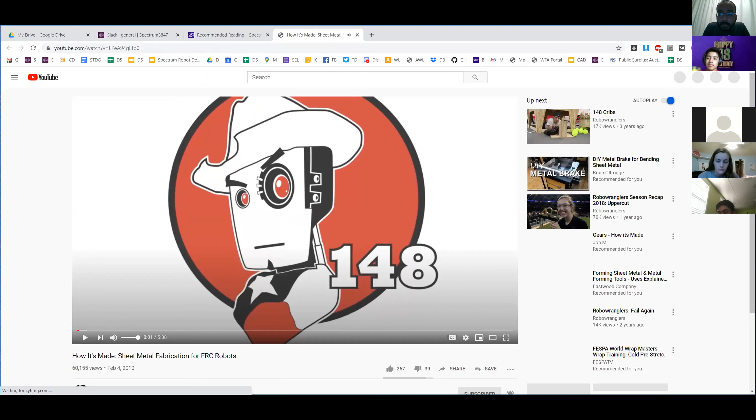In our recommended reading, we have a couple links about sheet metal, one of which is the 148, how they build sheet metal. So this is kind of the CNC process. Like, this is very similar to how our sponsor does it.

Our sponsors actually do sheet metal with a laser cutter and a CNC brake, and they kind of walk you through it. They add a little bit of stuff. They have a turret punch, which our sponsor doesn't have. There's a few other machines that they can have to make the process a little bit easier.

But if you have a sponsor doing your sheet metal, it's definitely a much more expensive process for the equipment involved. But there are things that we can do in our shop, and that's what we're going to talk about for the rest of this after we show this, to make sure we have an idea of what the sheet metal process is.

Why don't I have audio? You guys don't hear anything, right? No. Okay.

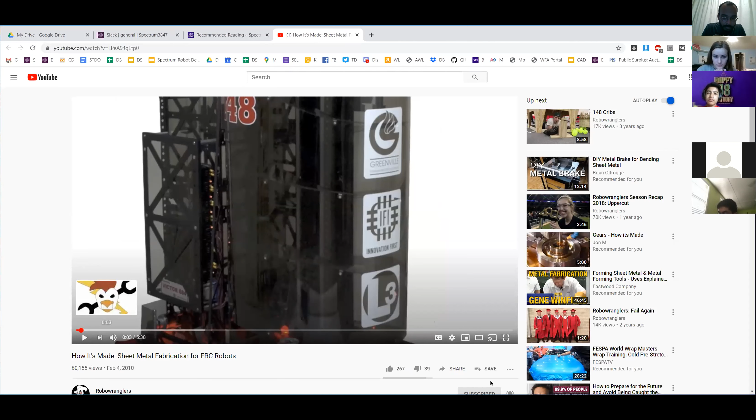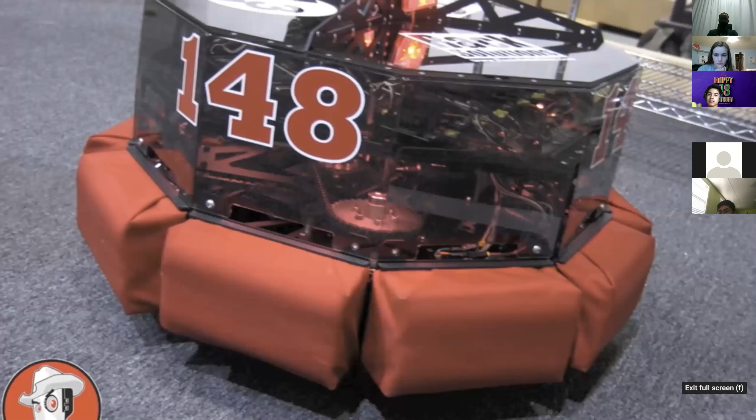Okay, back to here. Of Greenville, Texas, and the Thunder Chickens of Sterling Heights, Michigan have something in common. Their robots are well known within FRC for their distinctive look. This look comes from their almost exclusive sheet metal construction. Today on How It's Made, we're going to learn how this sheet metal is fabricated.

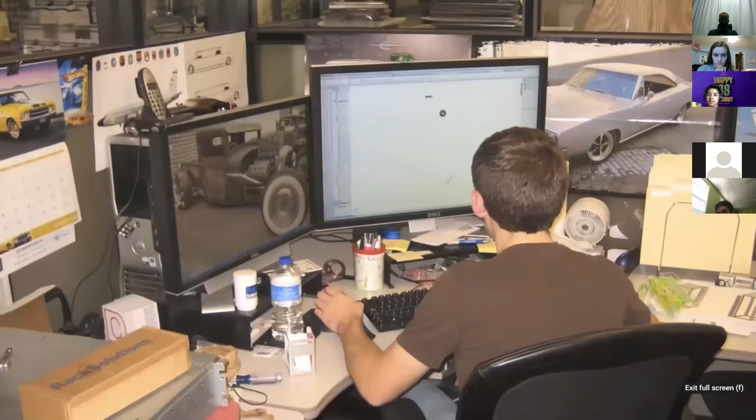After the team has finished their brainstorming and has made prototypes of their major concepts, the design team begins its work. It is their job to CAD the entire robot down to the smallest detail. Using the sheet metal features found in the 3D modeling program SolidWorks, each part is drawn as it will appear on the final robot. These parts are then flattened into flat pieces, which are sent to the sheet metal shop for production. Though the sheet metal shop is a CAD to metal facility that directly imports the CAD models for production, drawings need to be done to show the brake operators how to bend the parts.

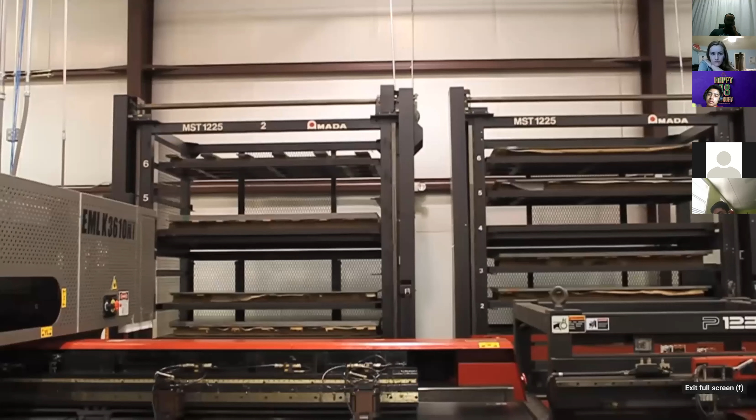Let's step inside the Innovation First International Fabrication House, Metal Solutions. Flat patterns of parts are imported so they can be programmed for production on the CNC laser cutter or turret punch. Every part starts as part of a 4x8 sheet of material. Typically, the Robo-Wrangler and Thunder Chicken parts are made out of Lexan or aluminum. The laser cutter and turret punch has a material loader. It can hold enough material such that the machine can run for almost 60 hours without any human intervention. Flat sheets go in, finished parts come out.

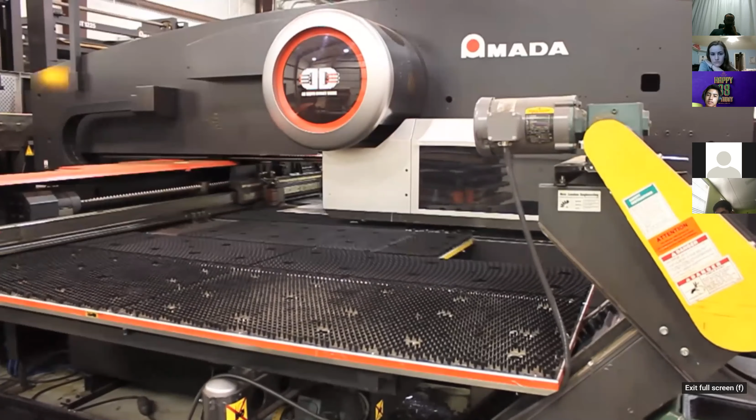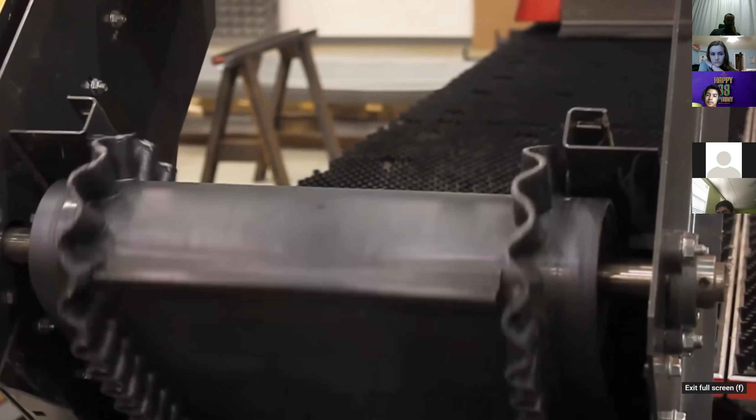Here you can see the turret punch cutting the outline of a part that will appear on the 2010 Robo-Wrangler robot. The CNC turret punch operates just like a 3-hole punch. Instead of cutting through paper, it uses 40 tons to punch right through metal. Here, you see the metal slugs that are punched out the bottom by the turret punch. These are dumped into a bin and then sent off to the scrapyard for recycling.

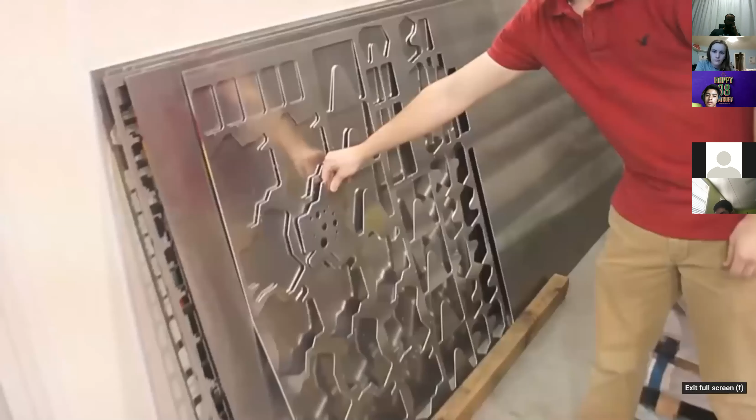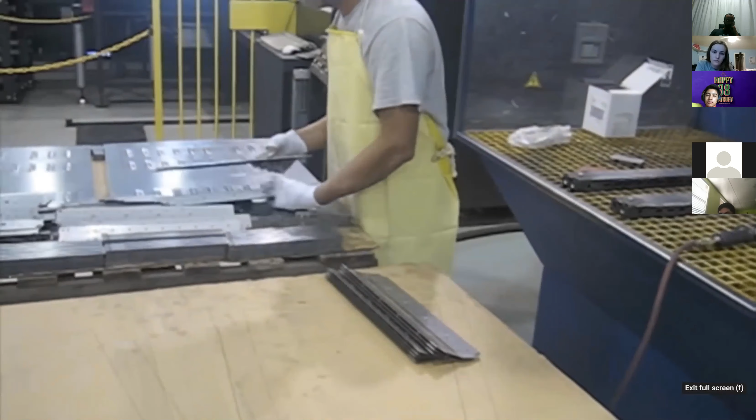Flat parts are still held in place on the sheet by something called shaker tabs. The parts need to be removed from the sheet before they can be bent. These shaker tabs, however, will leave burrs on the part that need to be removed. Here you see one of the deburr guys grinding off the shaker tabs. Each part is fed through the automatic deburring machine. This machine sands down all the edges, and puts a nice finish on each face.

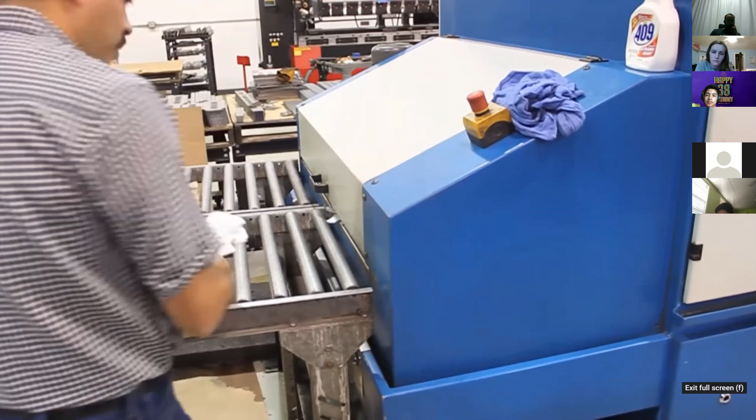After being deburred, the parts go off to the brakes where they'll be bent into shape. Here you see the top and bottom die of a brake. To begin with, the operator takes the flat part and the drawing and has to program the CNC brake. He needs to tune the machine for each individual part such that it is bent the correct amount.

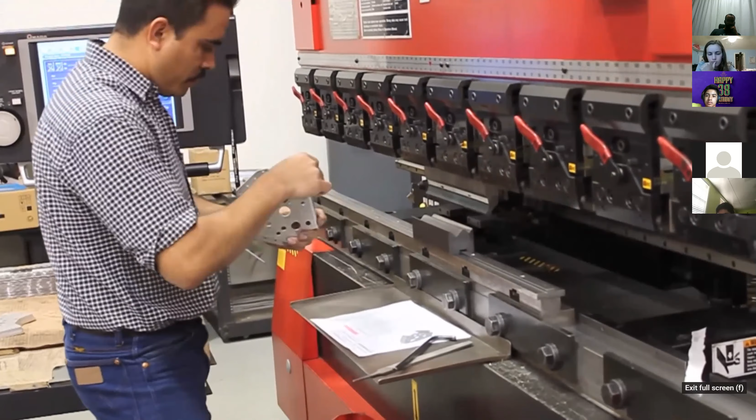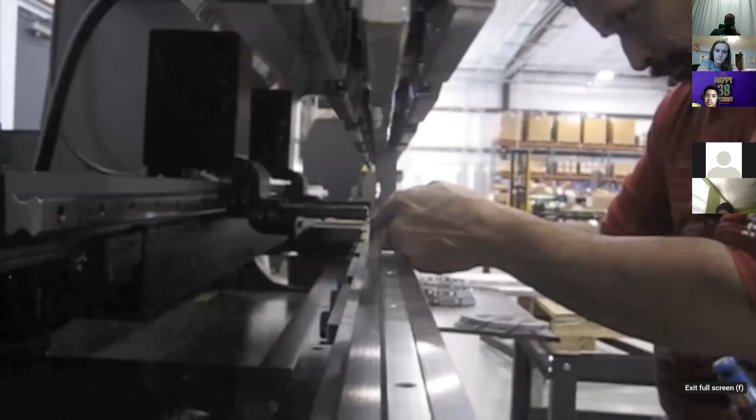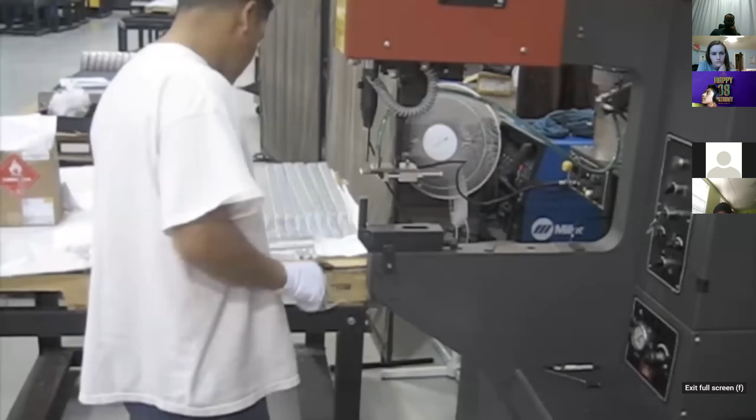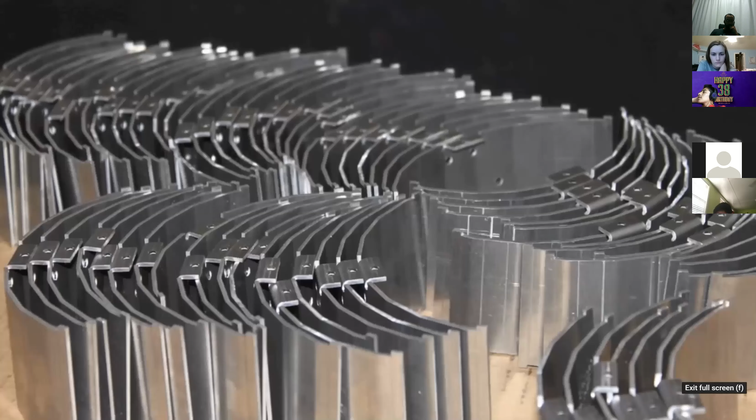Tuning the machine to get the parts just right takes a large amount of skill. After the first part is finished and the machine is programmed and tuned in, all the remaining parts take very little time to produce. Once the parts are finished being bent, threaded inserts are pressed into them. Completed parts are placed on a pallet and sent back to the team for assembly or out for powder coating.

So that's how the industrial process works. One thing to notice is all those parts require multiple people involved to make them. Someone has to operate the laser, someone has to operate the brakes, and people are moving those parts from place to place and keeping track of them. It's a lot of work to support an FRC team with sponsored sheet metal, so we're very grateful to Solarcraft for doing it for us.

It's understandable sometimes when things are off, especially if we don't communicate well. Like they showed in their drawing, we have to give them the drawings for the bends. If we make an error in that drawing at all, the bend's going to be wrong because they program straight off the drawing we produce. There's a lot that can go wrong when we're not involved in the process at all, where we just send it to them and hope it comes back correctly. Most of the time we do a pretty good job and it works, but it doesn't always work.

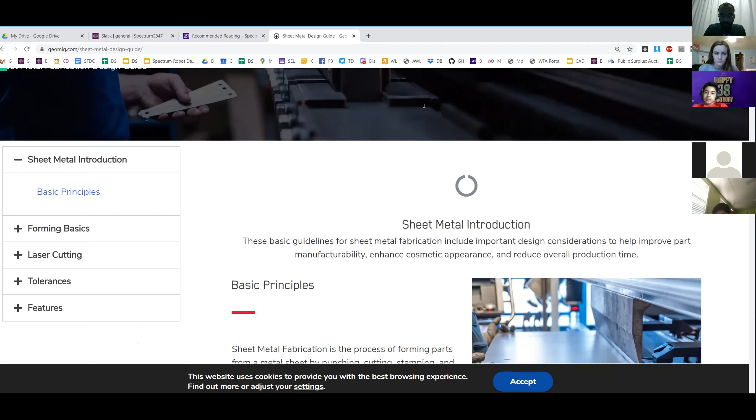The next link in the recommended reading for sheet metal is a new one I found from this company that does production work for other people. My laptop is being weird, let me see if I can get this better. Okay, but it has a good idea of going over the basics of why you'd even want to do sheet metal.

There's a lot of different ways we could build parts on our robot. None of them have to be sheet metal. Sheet metal, or bent sheet metal, is just one of the tools we can use to fabricate something and get the function we want.

One of the big benefits is you can use a thinner sheet and put flanges on it to add strength, just like folding a piece of paper makes it stronger than a flat piece, which bends everywhere. As you start putting creases into it, folding into a box shape, it's a lot harder to bend. The same applies to sheet metal, so we can use much thinner sheet metal than if we were just using a flat plate.

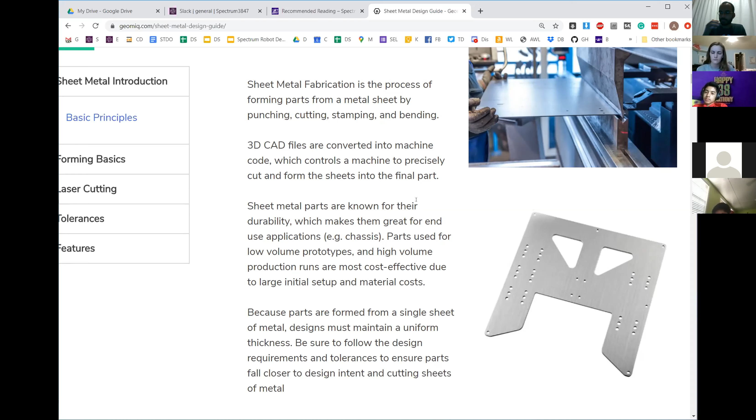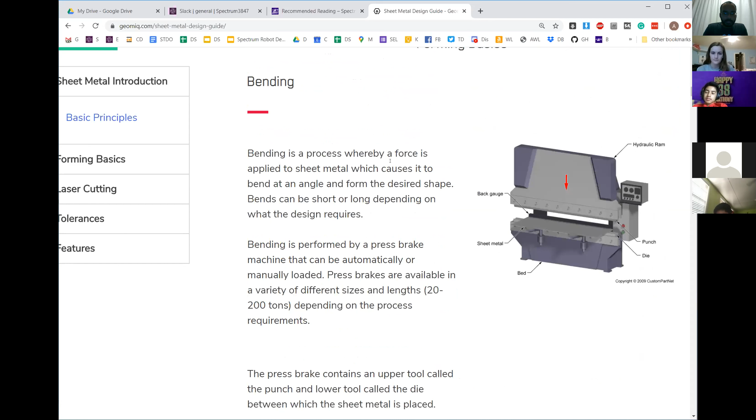So there's a few different types - the press brake is what they have at Solarcraft. We don't have a very large press brake; they cost a lot of money to get anything close to that. The brake we have in our shop is called a box and pan brake, where we have to lift the skirt to actually do the bending.

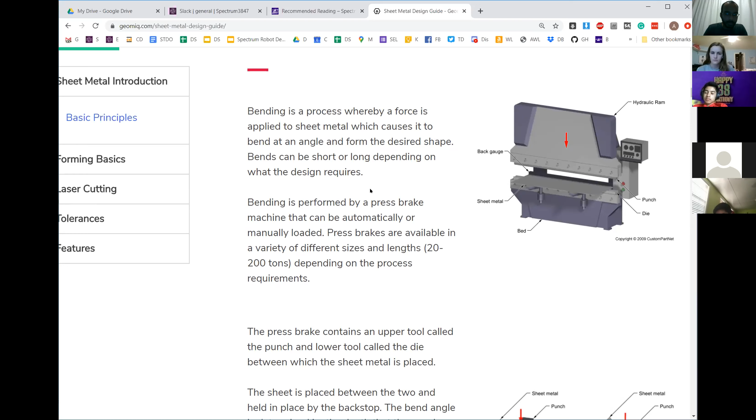It still works and allows us to set pretty decent bends. We can bend relatively thick material with it - ours is big enough to do 1/8 inch aluminum if needed. But a lot of what we want is to bend thinner aluminum and bend polycarbonate too, to use thin polycarb in places and get back some of the rigidity that polycarbonate doesn't inherently have compared to aluminum. It's a lot easier to bend plastic sheet than aluminum sheet, but by adding flanges we can make it stiffer and less likely to bend.

The basics up at the top are just how it actually presses the die in to fully form the 90-degree bend. Anytime you're changing the shape of a piece of sheet metal, it's called forming. For what we're doing, we're basically always using a press brake or a normal brake to do bends. In industry, they'll have form tools that are a lot more expensive, but they can just press right in and get full shapes out of a piece of aluminum - a lot of automotive car panels are made that way.

Very rarely would that be needed for FRC robots, since we're not making thousands of the same part over and over - we're only making a few. Bending is reasonable to do a few times and still get consistent parts. Making an entire press form or anything like that is probably not useful.

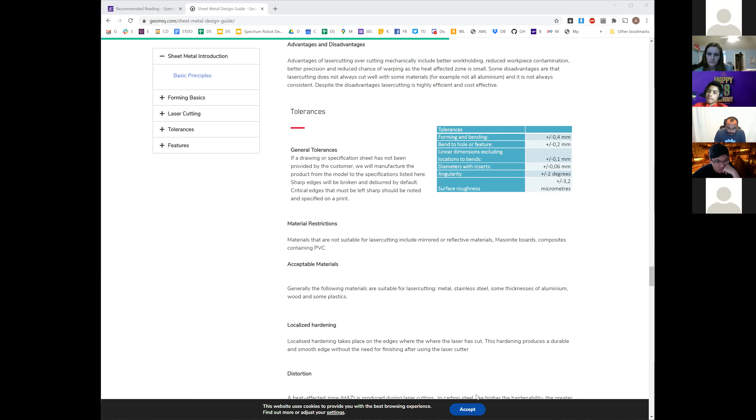This goes further into some tolerancing for the laser and stuff. Most of it is well within acceptable range for us in FRC—we're not too worried about any of the laser problems.

The laser does have kerf. On sheet metal it's relatively thin. What this is saying is the edge of the material when the laser cuts it isn't actually perpendicular—it's some sort of angle. We notice it a lot more with our laser in our shop cutting through relatively thick material, like 1/2-inch plywood—you can definitely notice the edge isn't straight. It's just the way the laser focuses: it focuses a beam down and then it comes back out, so you get this angled edge from the beam angle it's trying to cut through.

I'm not going to go through all the curls or anything like that because we almost never use them. But in general, this is a good place to look through to get an idea of how some of the sheet metal works.

I'm going to pull up SolidWorks and screen share it. There we go.

Okay, so we're going to do a super basic sheet metal part right now. And then I'm going to pull up the 2014 robot and we're going to go through that for our last little bit.

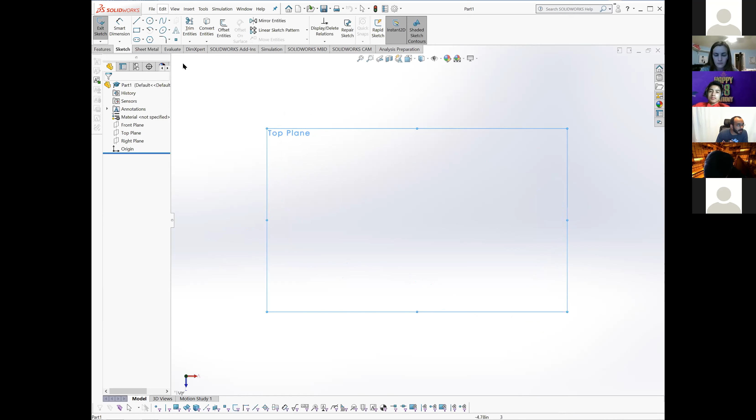Sheet metal parts in SolidWorks start with a sketch just like normal. For most of the parts we're doing, this is the way we design them. Sometimes there's a different way I can do after this. So we're basically going to do a base flange first. I'm gonna make a 3 by 3 square.

I'm gonna go over to the sheet metal tab. On your SolidWorks installation, if it's the first time you're using sheet metal, sometimes this button isn't here. You have to right click any of these tabs and select sheet metal. It normally doesn't show up in the default SolidWorks window.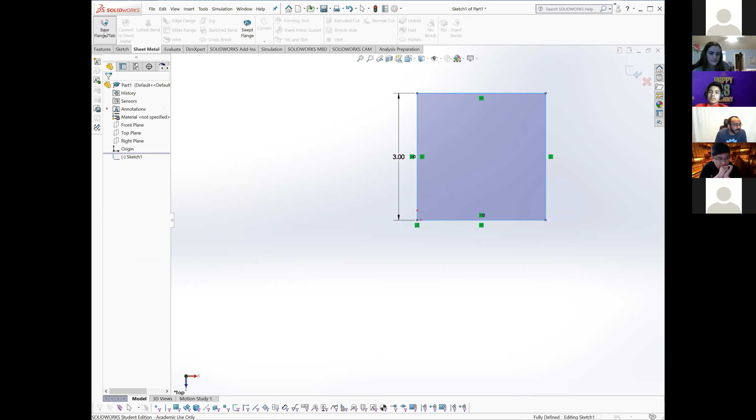So then I'm going to hit the base flange tab, and it's going to turn this into a piece of sheet metal. And I have to give it some parameters.

So here I have to tell it the material thickness, and then I have to tell it its K factor, like we talked about earlier, so that it knows how to do the bends once I start adding flanges to it on the outside. So I'm gonna go ahead and tell this that it is 0.09. That's our most standard aluminum sheet metal that we use.

And then I'm gonna leave the K factor at 0.5 for now because it's not important, but actually if we're doing this for Solarcraft, we have a special gauge table in our GrabCAD folder that we use, that we pull through. So it has all of the settings for you. You don't have to type anything in. You just hit use gauge table, and when you select the thickness of material, it sets everything for you already, and it's all ready to go.

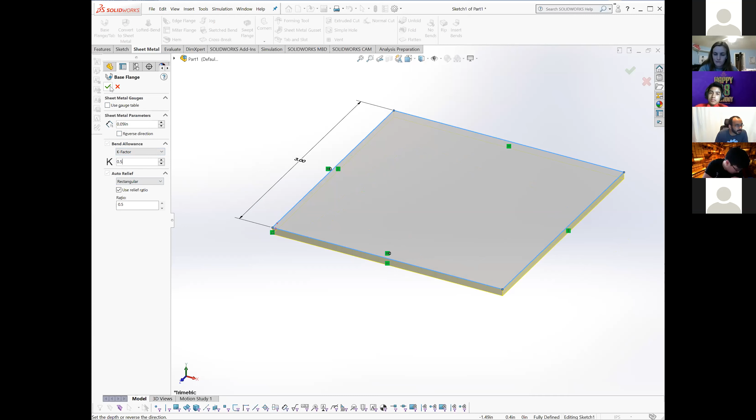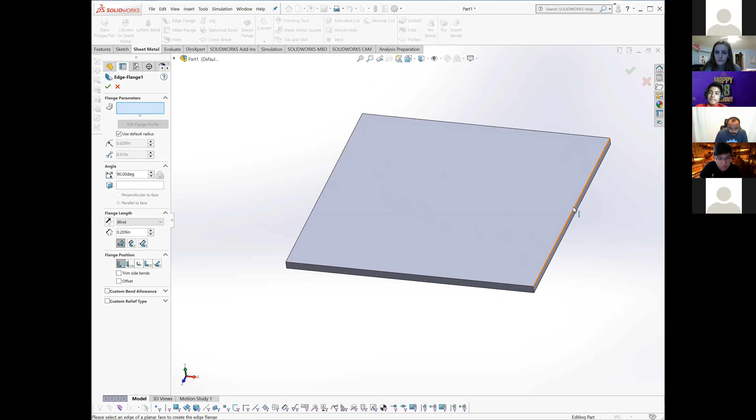So now I have this 0.09 piece of aluminum, and it's just a square. If I want to add bends to it, we come up here to the edge flange button, and we select any of the edges, and we can pull it up and tell it how long the flange is going to be.

So I can tell it, okay, I want a 0.5-inch flange, but that's not all we have to tell it. We have to tell it, what do we mean by a 0.5-inch flange? There's a few different options here.

So you can do outer virtual sharps, which means it's measuring from this back side to this top face, this top edge here. You can do inner virtual sharps, so the whole flat here is going to be 0.5. Or you can do it from tangent to the bend. In that case, these two are actually identical because the bend was 90 degrees. If the bend isn't 90 degrees, those become different things.

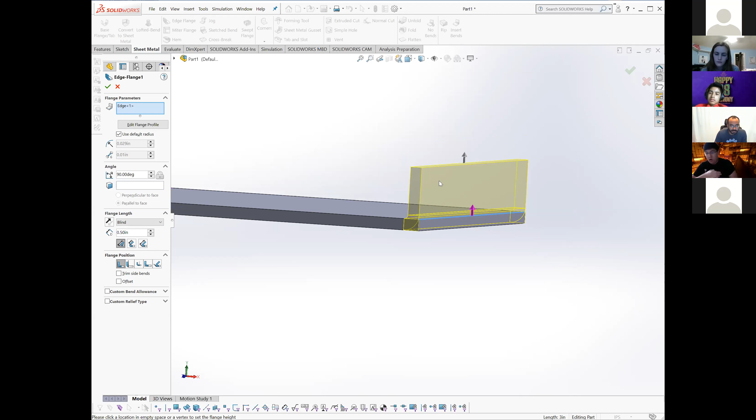Most of the time, we almost always use this outside virtual sharp measurement for this choice. There are times when designing that you need to do something else where the flange length matters and you're clicking this button, but rarely does that happen. Most of the time, you're just going to leave it alone and use the first one.

The next one, however, does matter quite a lot, depending on what you're building. So remember, we started with a 3 by 3 square. The question is, as a designer, did we want the flat part of this piece of metal to stay 3-inch by 3-inch, or did we want the flange to be included in that 3-inch length?

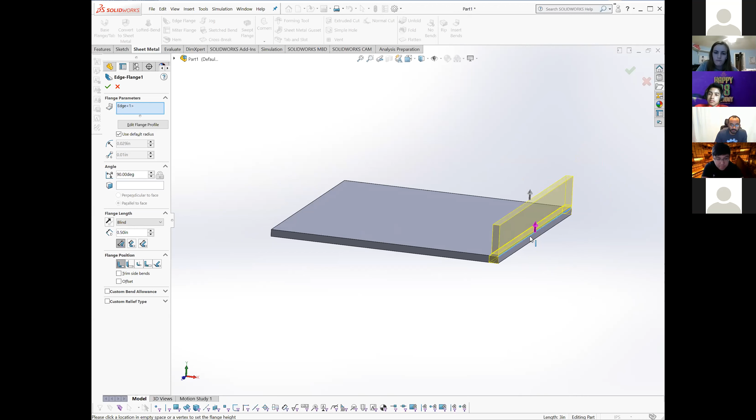So right now it's material inside. So from this top face that's going to be bent over to here is going to be 3 inches because the material's inside of this plate. If we come over, we can move it to material outside, which means the inside of this flange to this outside is going to be 3 inches. We also have bend outside, which puts us at the entirety of the bend, so now this whole flat square is back to 3 inches by 3 inches.

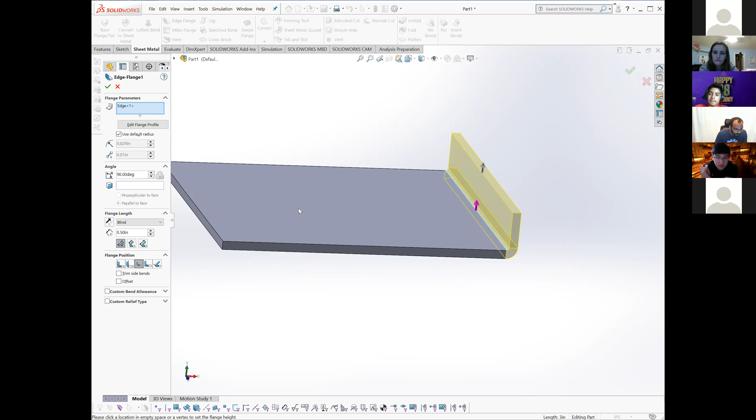And then there's other ones that aren't important for 90 degrees because they're basically just the same as ones that already exist. The thing does not move for any of those because for 90-degree bends, they're identical. If you're doing some weird bend that isn't 90, it may be important to do that. The vast majority of sheet metal bends that we do on the team are 90 degrees, as many as we can. It's just easier for them at Solarcraft to bend 90 degrees quickly. It's also easier for us to do 90 degrees in our own shop if we have to make them ourselves.

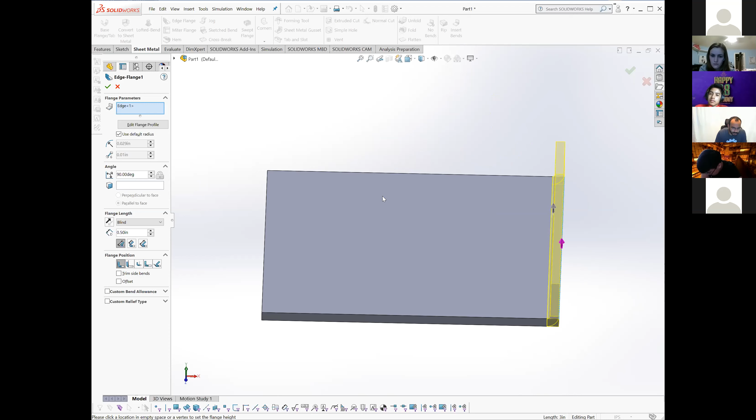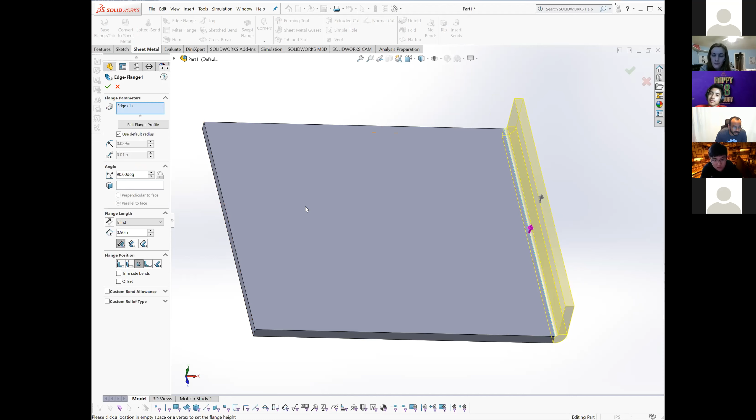So I'm gonna do that one with bend outside. Okay, so that's basically a sheet metal part. You could keep doing that. You can also, if you know you want the same flange on a separate thing, collect multiple edges in the same bend. So now if you have like a C channel, if you're building something that needs it on both sides, you can click them. If you needed it on all four, you could do it as well, and it'll figure it out for you. So all of those are options.

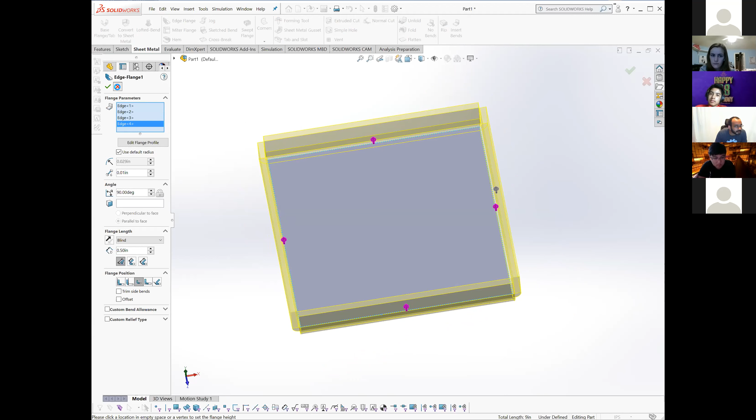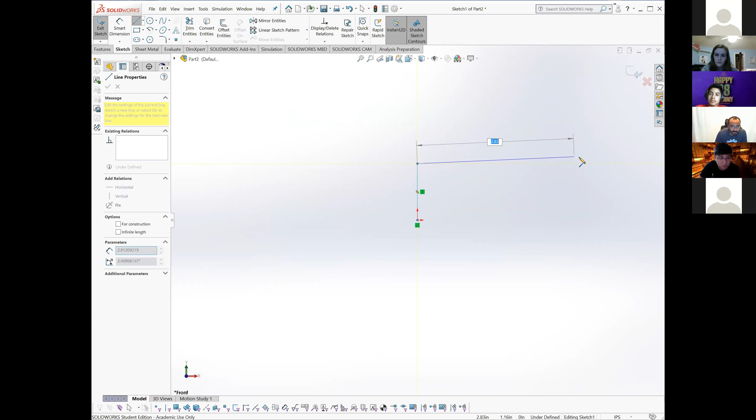The other thing you can do, which I don't think we go over nearly as often, is if we know the rough geometry of something we want to make. Say we know we want to make some Z piece of thing, and it has different shapes or different lengths. So we want this length to be 1 inch. We want this length to be 3 inches. And this one's going to be different. This one's only going to be like 0.75.

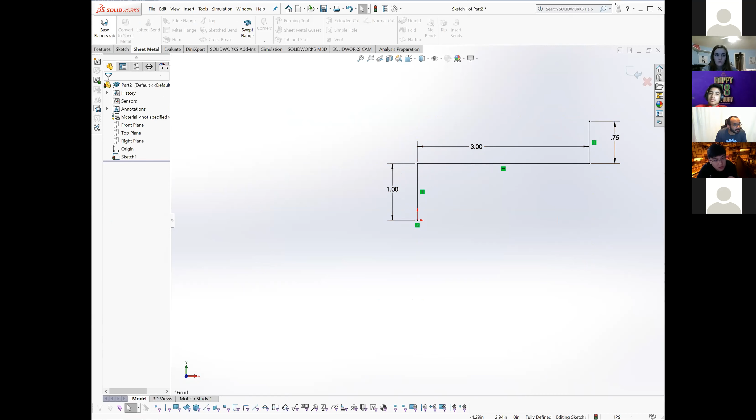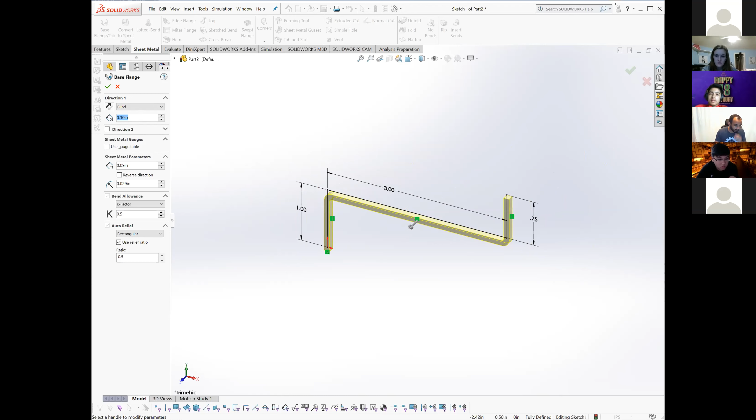So now if this is going to be this whole Z piece of sheet metal, we can come into sheet metal and do new base flange just on those lines. And it'll let us set a length here for however long we want. Say we want a 10-inch piece of this. What's it doing? Oh, that's thickness. I hit the wrong button. Direction 1, this is what I wanted. Okay, 10. So now you don't have to go in and make both edge flanges. You don't have to set everything up. It already did it for you based on how you drew it.

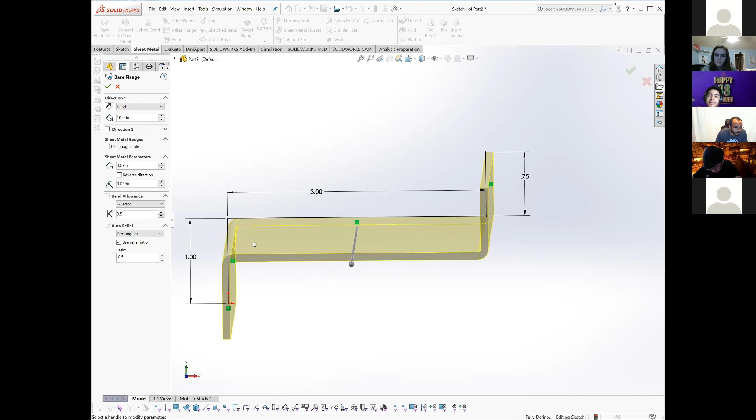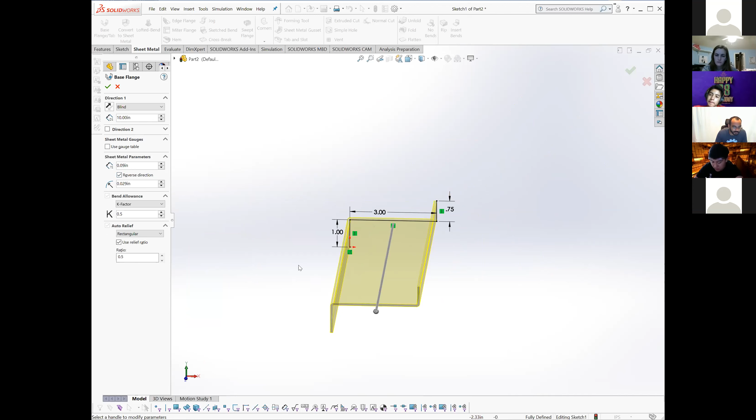It does matter kind of which way the material is, so you can flip which direction the material is in if you need to. That normally doesn't affect much, but depending on how you're drawing it, it may matter. But you're basically just drawing one side of your entire part, the entire profile of your part, and then it'll do the rest for you. And it'll add in the right bend radiuses and everything. So sometimes that's faster than making a base flange and adding flanges. It just kind of depends on what we're drawing. If you're trying to connect two different things, this might be faster.

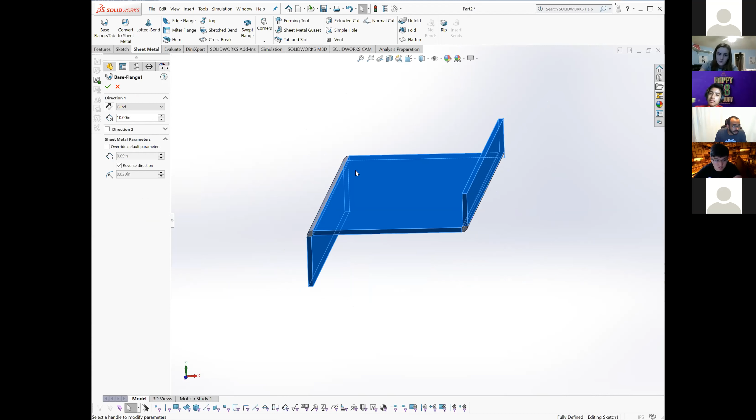Wait, so would the line you drew in the sketch be in the center of that part? No, it's one of the sides. So it's either the inside or the outside. Okay, right. So right now, the line I drew is this bottom side, however you want to talk about it, right? It's this piece of aluminum. If I hit the reverse direction button, it flips to the top side. Okay, I got you. Yeah, so you get to choose which one you're looking at.

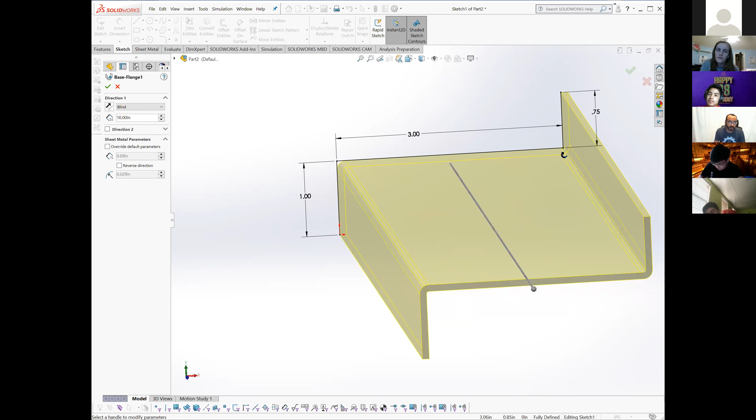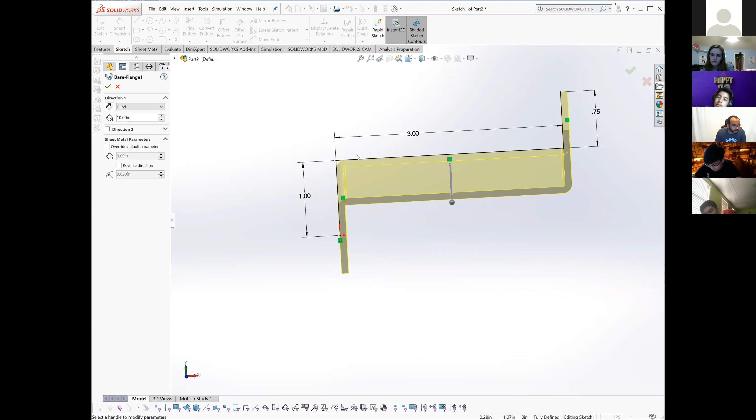So it's a little awkward though, because if you were trying to connect between two things, and it was like this S bend, you would need to draw it, and this would be 0.09 away from the thing you knew you were going to have to touch, right? If it was just a C, it becomes much easier. It doesn't have to be an S. It could just be the L if you want to do it that way. It can also be a C. So if you did that, this makes a little bit more sense. Now you're just drawing the entire outside of that C.

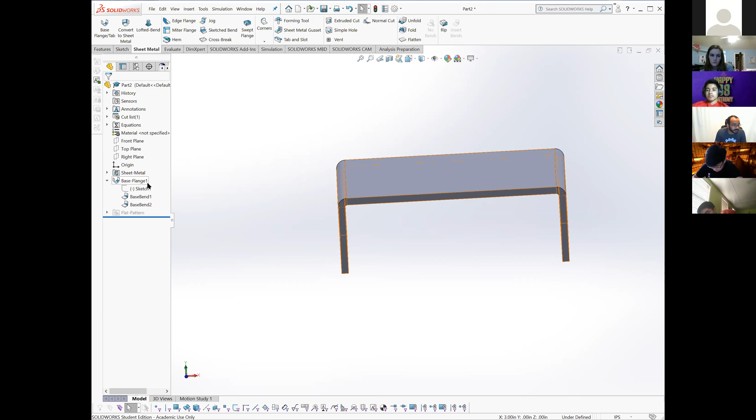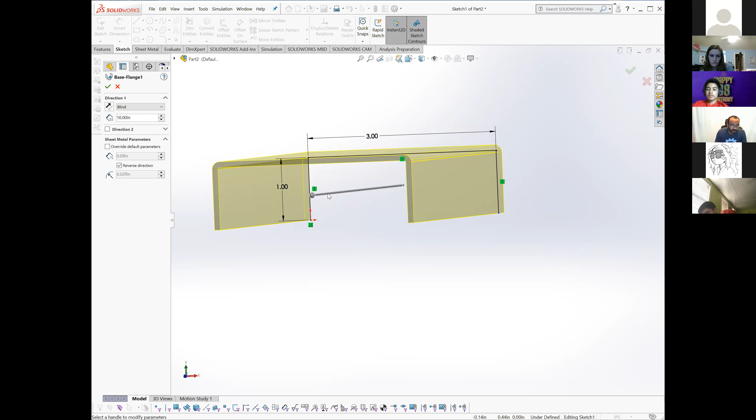There. Right, so now it's the outside of that C, and we know this face to that face is exactly 3 inches. If you reverse this one, it goes the other way, and now this whole thing got bigger, but now we know the inside of this is 3 inches. Does that make sense? Yeah.

Okay. So how do we use sheet metal to actually build a robot? I'm gonna go